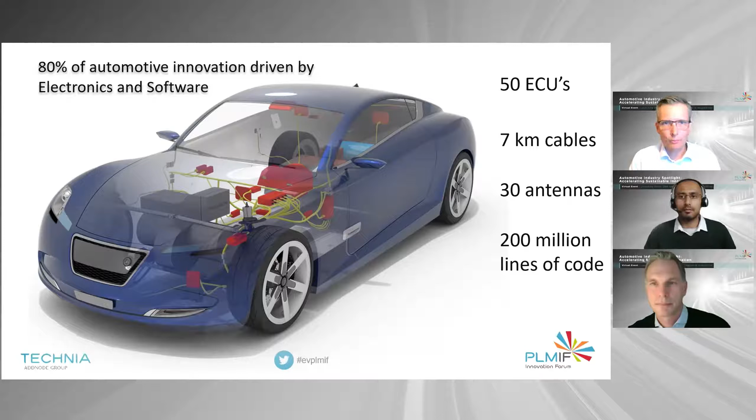Let's leave that as an introduction for the topics we are going to address today. The main topics we want to share with you today: first, I'm going to share some insights into how software can be managed in a PLM and ALM context. Then Thomas, you will tell us a bit about electromagnetic simulation. And Amit is going to walk us through electrical engineering and all these challenges related to harnesses and PCBs and everything related to that. So let's get started.

Let's continue with the first topic, integrated software development. Software is now increasingly becoming a hugely important part of vehicle development. Historically, developing a new car was a lot about managing the mechanical development and all the physical parts that make up a car. That is still relevant, but it's relatively losing importance compared to electronics and software development, as we see an exponential growth in support systems that a modern car has, from entertainment systems to the development towards autonomous drive.

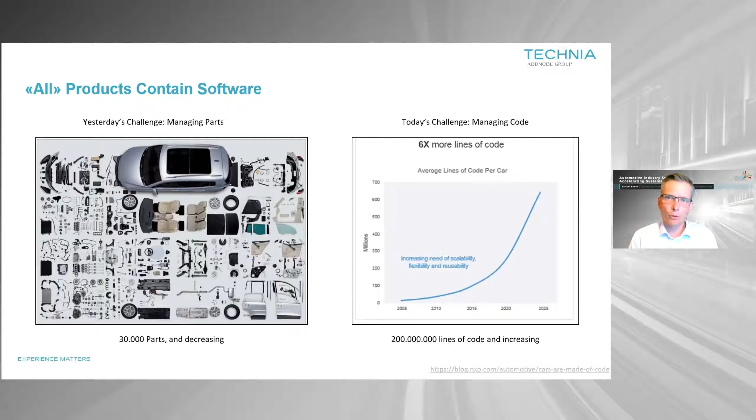Linking that to the topic of the day, product lifecycle management, and how this can be integrated and managed using modern computer systems. The 3DEXPERIENCE platform from Dassault, which we mainly work with to manage the development of cars and other products, is built around a digital definition of the product. To establish that digital product definition, you have to integrate models covering all disciplines. Today we are touching on simulation, electronic design, and software.

All of that information is brought together into what we call a unified product structure that represents the product and carries all information that is needed to design and describe this product to the tiniest level of detail. In this shift from document-based ways of working, we now see a big transition towards more model-based ways of working, which means a PLM system, PLM platform needs to be able to manage models coming from all these different domains.

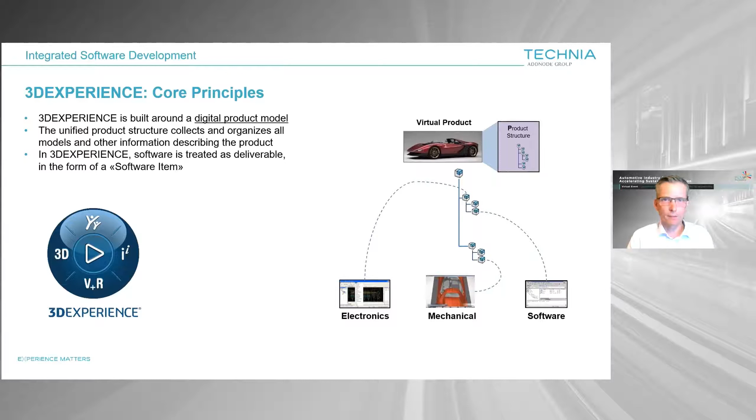So in this first presentation, I'm mainly going to focus on how the software aspect is managed. Software, even if it's not a physical thing, is still part of the definition of the product, which needs to be managed in line with the more traditional geometries and harnesses and everything that makes up the definition of the car.

So from a 3DEXPERIENCE point of view, you always have this product structure that represents the car. In this example, an ECU, and the ECU, of course, contains both mechanical components, electronics, and software that is running on that unit.

So in 3DEXPERIENCE, we have a notion of software items, and with the quite new role and capability called software engineer, you are able to link the actual code and keep track of the version management directly as items in the product structure, meaning that you have the same level of configuration control, version control, and visibility of which version of the software goes with which version of the hardware.

You can even establish and maintain links to external code repositories. So the actual code will normally not be on the 3DEXPERIENCE platform itself, but it will be linked there from external software code management, configuration management systems like Git.

But for full visibility across all disciplines and all members of the engineering teams. When talking about software and software development, we also get into a territory where the actual development processes are a bit different from the traditional mechanical and electronics development.

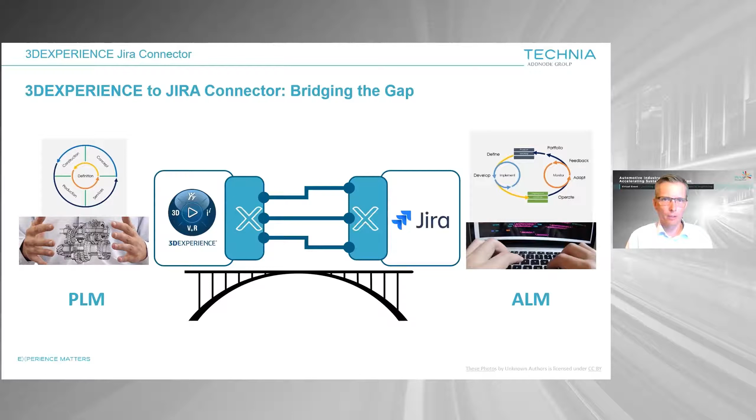So what we have done to mitigate that issue is that we have developed a connector that brings 3DEXPERIENCE close together with Jira, allowing information to flow seamlessly between the two and allowing our customers to use each tool, each platform for the purpose that it's best fitted for.

So to show you or explain some examples of what you can do in 3DEXPERIENCE, like we have already mentioned, you have your engineering items that are organized into product structures.

That is the kind of main carrier of information. Related to that, you have a number of different artifacts and processes that represent different activities that have to take place during development. It could be change management, requirement management, ad hoc or planned task management, and keeping track of issues, as some examples of what you typically would take care of using a PLM platform.

Some of these same needs and concepts also exist in the ALM world, but in that world you usually use different terms. In Jira, for instance, everything is concentrated around different types of issues that you use to organize and plan your work, typically as epics, stories, tasks, and bugs to keep track of anything that needs to be fixed.

Using our 3DEXPERIENCE to Jira connector, you can easily build a mapping between your information models and processes that you work with on either side.

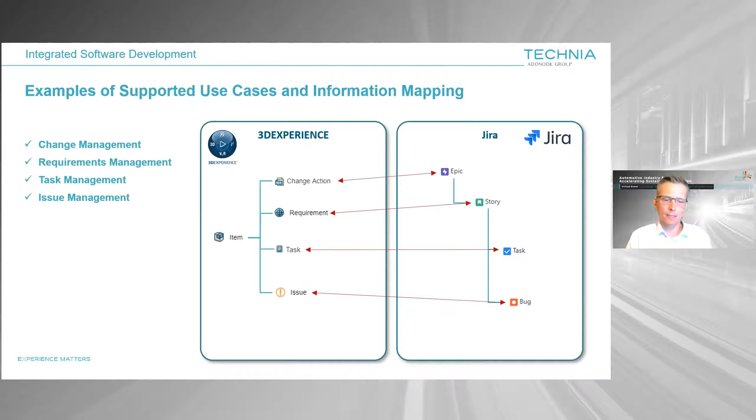So as an example, you might want to map your change actions into epics, your requirements into stories, tasks could be, as in this example, something that exists in both systems, and then an issue identified in 3DEXPERIENCE might become a bug in Jira. But we support full flexibility so that you as a customer can map whatever information item into any information item in the other system.

So to show you an example, starting with issue management: what we see here is that in 3DEXPERIENCE we have the same examples we saw before, the ECU that contains hardware components and also software items. In this case, there is an issue identified.

There's a problem with this unit, and it's not yet clear what is the cause of this issue. So it's raised against the end item, the complete ECU with the full product definition.

After some investigation, it is concluded that this is an issue that has something to do with the software. It's not a hardware issue. So you want it to be resolved by the software engineering team working in Jira.

As soon as the issue is properly described, you will initiate this process, and the issue will then automatically be replicated as a bug into Jira.

On the Jira side, the software team will start investigating and mitigating, fixing this bug and correcting the software code, probably creating subtasks and planning and executing their work as they normally do inside of Jira.

As soon as the job is done, it will be reflected in the workflow in Jira, and a signal will be sent back to 3DEXPERIENCE that now this job is complete, and the issue can be closed.

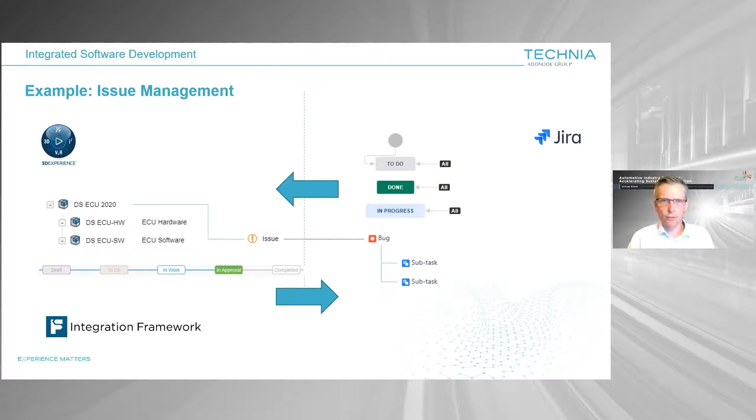And then we'll ensure you that you have closed-loop traceability all the way from issue identified until the problem has been solved and the new version of the code has been integrated into the product.

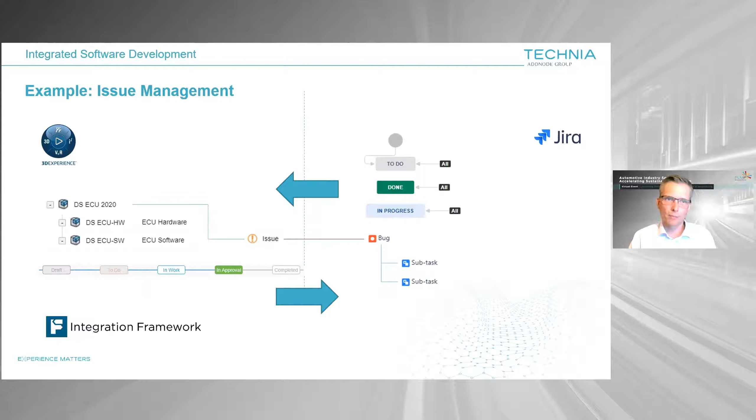So by running through the exact same process again, what you would do from the 3DEXPERIENCE side is start by creating an issue where you would typically describe and categorize the problem. What is the issue? How critical is it? And so on. Capture all the details.

Then you would link it to the product or item where the problem has been identified, and you might want to add some supporting documentation. Could be screenshots, images, any other documentation that explains in more detail what the issue is about.

So what will now happen in the background as soon as you start the workflow is that the issue will, by the connector, be sent to Jira.

In that case, it will quite more or less instantaneously show up in the inbox of the software engineer that is working on that issue.

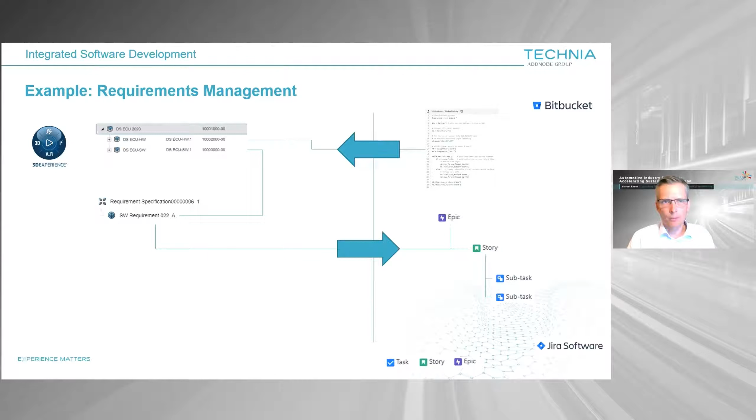So we could consider the requirement specification to be an epic, and then manage each individual requirement as a story that needs to be implemented. On the Jira side, you can then use all the normal functionality to break this further down into individual tasks and activities. And then, of course, the end result of this development would be a piece of code that you would then link back into the product structure as a software item.

This is what it would typically look like. In this case, you have the requirement management module in 3DEXPERIENCE to the left, and you have Jira to the right. As soon as a requirement is ready to be processed, it will be sent from private to in-work, and that will then automatically make it available in Jira. So this is an example of what it would look like.

Like in the issue example, you can see that the detailed properties of the requirement also include, not shown on this picture, any rich text, images, any more detailed description of the requirement. But all the key properties, the life cycle state, is brought across to Jira, so that the software engineers can easily access the information they need to start their work and feedback on the status and progress on implementing and fulfilling this requirement.

And related to that, another area that we support is, of course, also the test management to verify and validate that the software requirement has been properly implemented and that the requirement is met. There are also many other examples, but for this session, we'll stick to these two.

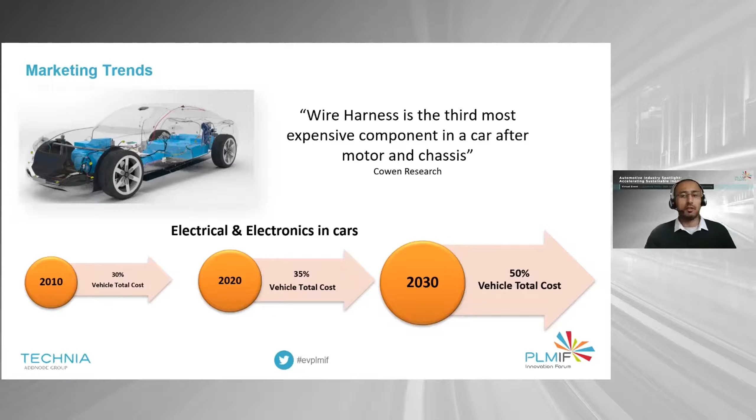So the overall process would be, outside of 3DEXPERIENCE, perhaps you might leverage some parts of the platform to help with preliminary aspects of the electrical vehicle design. That's the specification planning - what is the actual requirement? Perhaps you decide the first requirement is, hey, I want an electric vehicle. How many motors? Does it need to be all-wheel drive, front-wheel drive, rear-wheel drive? How is it going to be controlled? What's the range, etc.? So all of that information, you may use other aspects of the 3DEXPERIENCE platform to capture those requirements.

You then have system architect diagrams and a control architecture diagram, where you determine what components you need and how they would affect one another. Perhaps you may have a radar sensor at the front of a car that needs to communicate with a controller which controls the motor speed. So as it approaches a distance, coming up to a vehicle in front, the radar might tell the vehicle to slow down, reduce power to the motors, etc. So you'd set all that up in your system architecture.

Once you have all that defined, this is where 3DEXPERIENCE comes into itself. You'd go down two routes, and it doesn't matter which, you can bring them together collaboratively. Typically you'd go down the 2D schematic route - creating a schematic of how everything is laid out and how everything will talk to one another. What pin communicates with what pin on a different controller or sensor, how one sensor feeds into another, etc. All of that is drawn out in your 2D schematic.

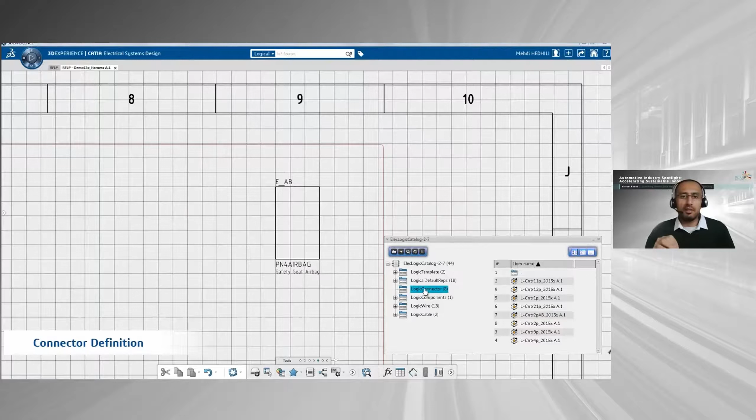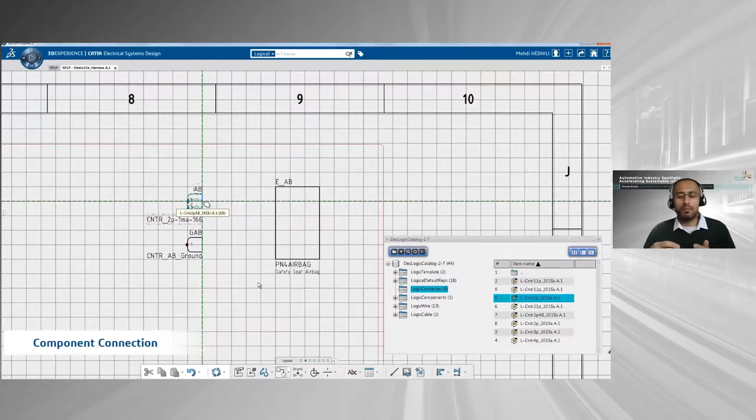What you tend to have is individual components stored in a catalog, so to make everything easy going forward, you'd spend time initially doing the setup. You can see here on the screen, currently we are taking connectors which have been previously defined, stored in a catalog, and reused in the schematic we're looking at now. The reason for that is, generally for electrical design, you're reusing components - you're not generating or creating new components. You'd go to a manufacturer of a component and store that information in your catalog to reuse later.

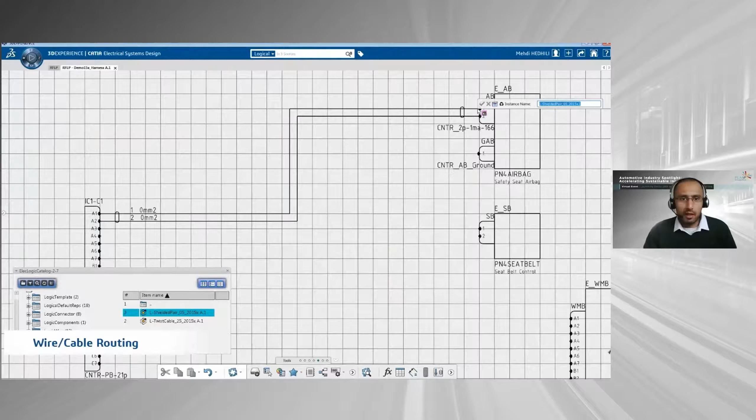What is unique in different electrical infrastructures is the routing and how one component may communicate with another, but the end components are typically reused. So in this case, we have a bunch of connectors and control modules, and what we're doing is basically routing the individual wires from each pin from connectors and telling 3DEXPERIENCE what connects to what - where is A, where is B.

Eventually what we'll have is a full infrastructure diagram. We've told it the size of each wire, and we can give the wires a unique identifier as well, so we know what wire communicates with what, and which pin it goes from one controller to perhaps a sensor.

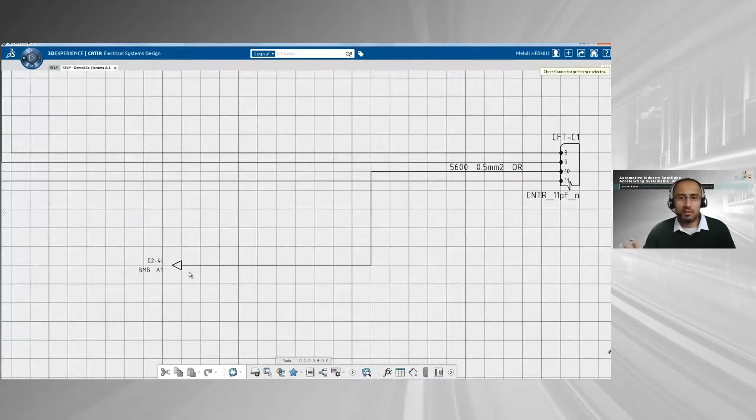You can see from the screen it's literally just drag and drop. You click on one component where it starts, and click on another where it stops. Once we've designed that in the schematic, we can take that and feed it into our 3D.

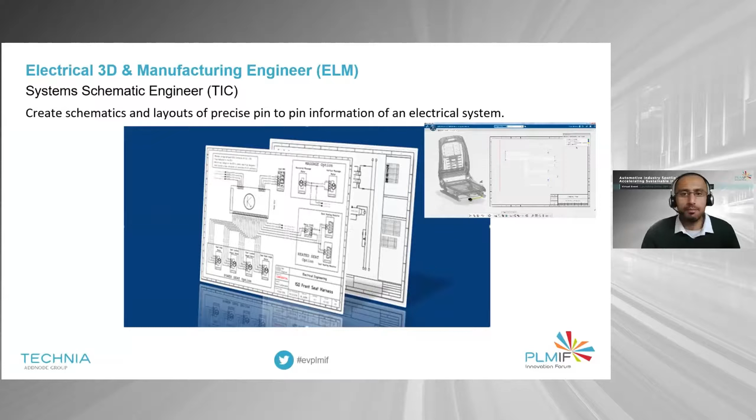What we would have done is taken that information and used it to drive how our 3D wire harnesses are laid in the vehicle itself. If we move on to our next slide, what we would typically do in our 3D now is create our library, similar to how we created a library for our schematic. However, we still need a 3D representation for the CAD.

As I mentioned, all of these components are usually purchased off-the-shelf. There are suppliers you can purchase these from, and you would download these components rather than design them yourself. Unfortunately, currently there are no electrified standard parts. There are electrical standard parts which you can download, but they are just dumb solid models typically. I think the ISO standard step files are looking for a way to unify that, but we're not quite there yet.

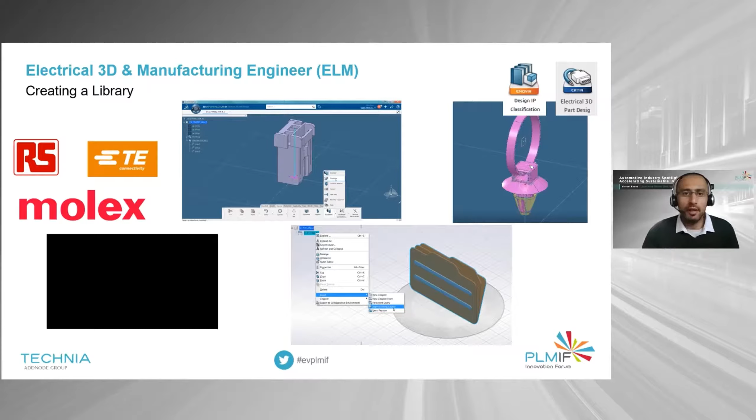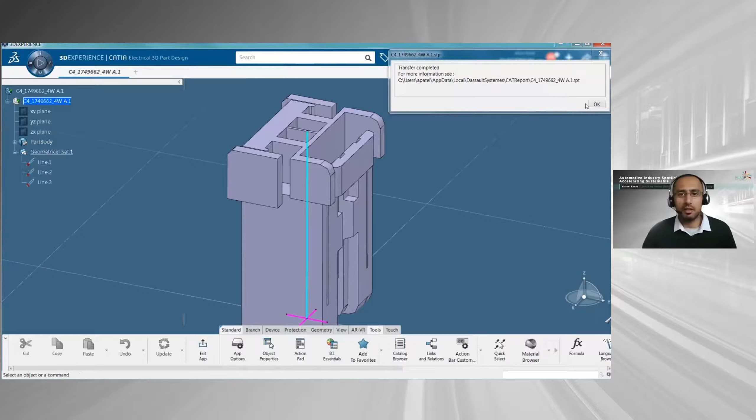So what we will typically do is download these models from a manufacturer and import them into our 3DEXPERIENCE session. There'll be an ISO standard file type, like a step, and we would build our library. We wouldn't do this on a need by need basis, thinking 'in this particular harness I need this connector today.' You would look at your complete arsenal of connectors and think, I use all of these connectors from this manufacturer, these from this other manufacturer, and take the time to build my library inside 3DEXPERIENCE. Now, before we build our library, once we've imported the dumb solid, we have to electrify it.

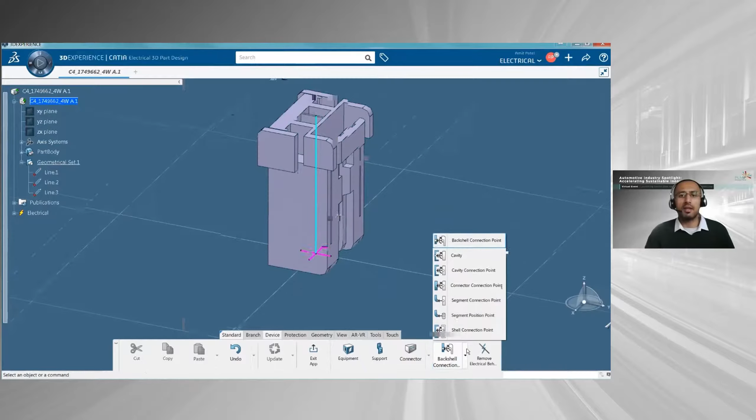So we have to tell 3DEXPERIENCE how it behaves electrically. We'll define how many pins it has, where the bundle connects to the connector on the back, how it may connect to a back shell. So later on, once we have it in a catalog, we would be able to say this back shell needs to connect to this connector, and everything will just connect and align as required. To get the alignment correct, what we do in 3DEXPERIENCE is make use of axis systems. In this particular case, we are using axis systems.

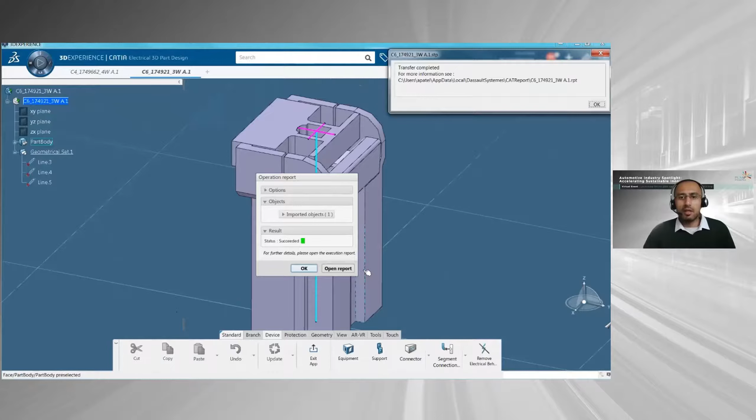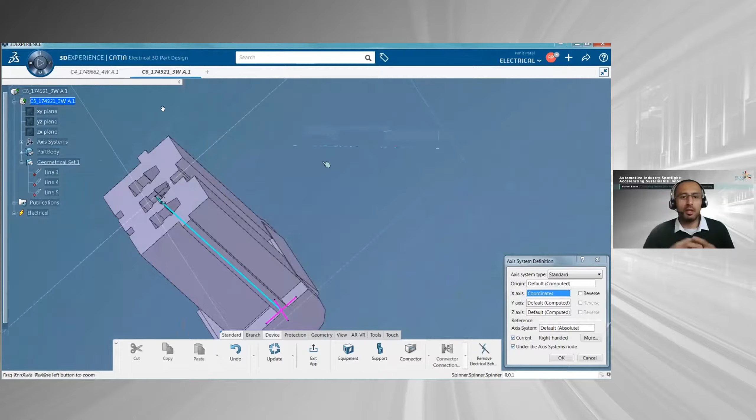Now, I've talked a lot about connectors, but we aren't restricted to just connectors. We can use other electrical components such as supports and retainer clips, etc. If you have a control module that you want to electrify and place connectors inside, we can electrify the control module as well. And the benefit of the 3DEXPERIENCE platform is we can also remove electrical behavior. So if we've accidentally electrified a CAD object that didn't need to be electrified, we can remove that behavior as well.

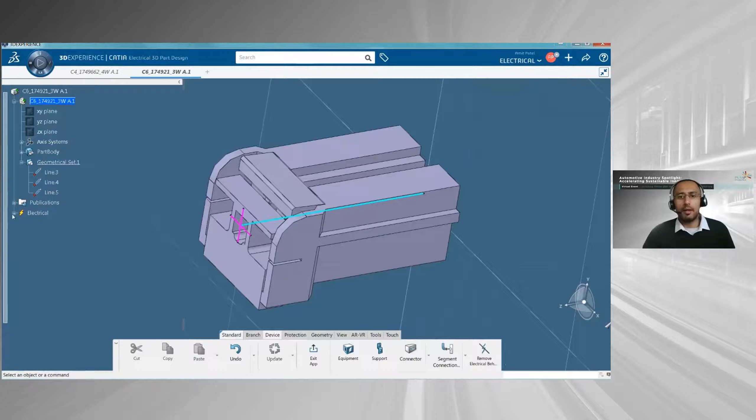From here as well, we can also create protection, so any protective sleeving that you would use to build your harness, or heat shrink, you can define that in here as well. Eventually, with our support, we would take all this information and compile a catalog that we can reuse.

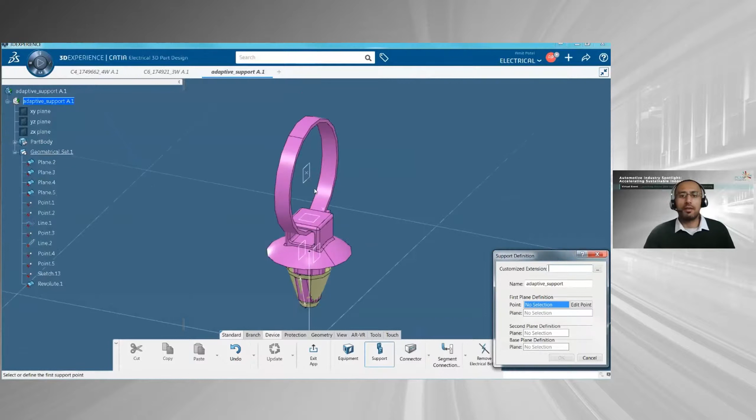So having built our library of electrical standard parts that we'll be using, and given them electrical definition inside 3DEXPERIENCE, the next step is to place the components. So where will they be placed? We would know from the rest of the CAD. Take the example of a car door: you would particularly know where the connectors would be as a rough estimate, place those connectors in those positions, and then create a wire route harness.

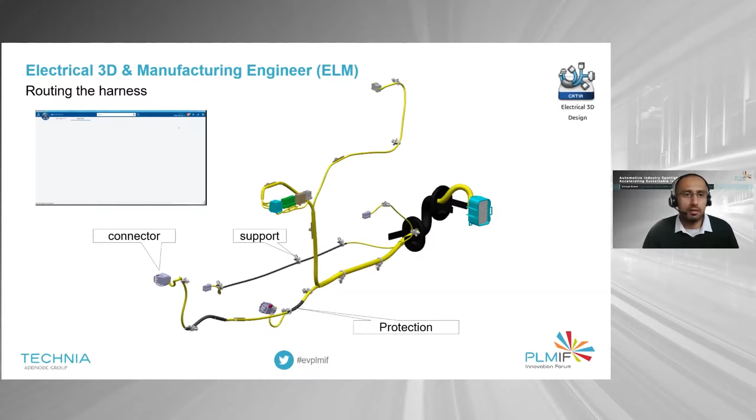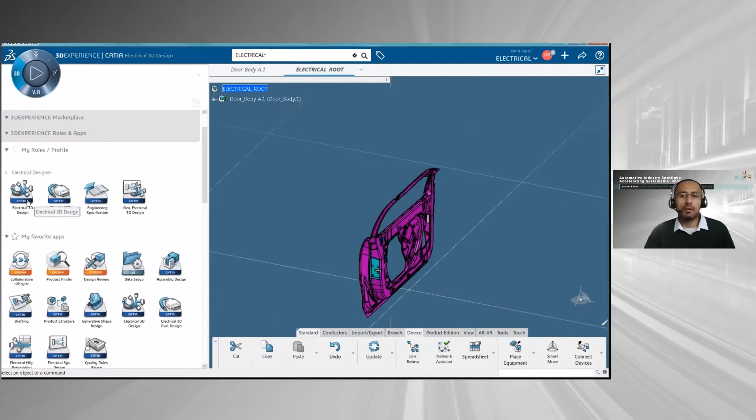So if we have a look at that - the benefit of using 3DEXPERIENCE Electrical is if someone suddenly changes part of a structure and it's now clashing with your connector or your routing, it's very quick and easy to just move a connector or add more control points to reroute your harness around the obstacle. You can also use the obstacle tool in 3DEXPERIENCE, which will allow you to automatically avoid other objects.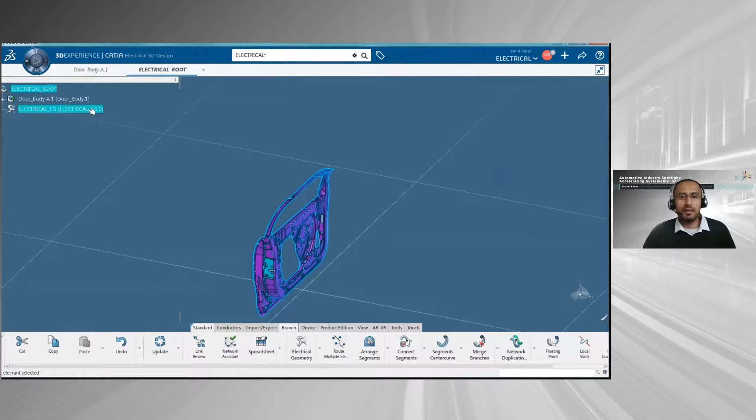So what we're doing here now in 3DEXPERIENCE, we're actually creating an electrical assembly. This is different to a CAD assembly because we're telling 3DEXPERIENCE that it's electrified, and all we're doing is taking connectors from our catalog.

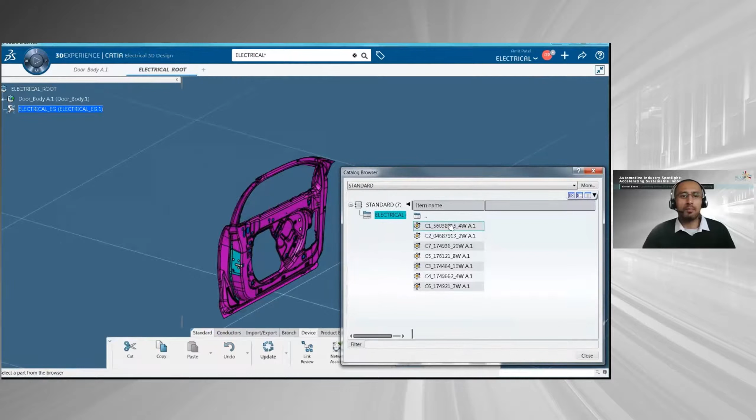So these connectors that we downloaded from our manufacturers and then electrified in 3DEXPERIENCE and stored in a catalog, and then we'll be placing them in this particular car door, wherever we would like them. You can see it's literally just select the connector and click where you would like to place them.

So you can, of course, later orientate it, and it's no different to handling any other type of CAD data in assembly. The only difference is there's electrical definition in the background.

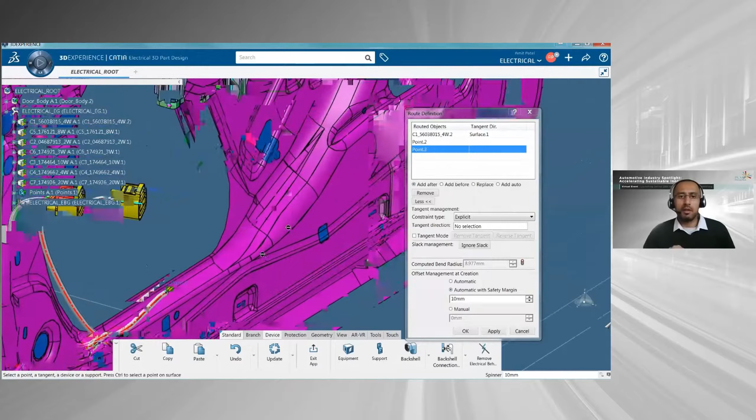So once we've placed all our connectors, what we would then do is essentially route a harness. Don't forget, at the moment this harness is a bundle. So let's say there's 50 wires going from one connector to maybe 10 wires to another connector. We're currently just saying there's a route between connector A to connector B. We're not interested in the pin information at this point.

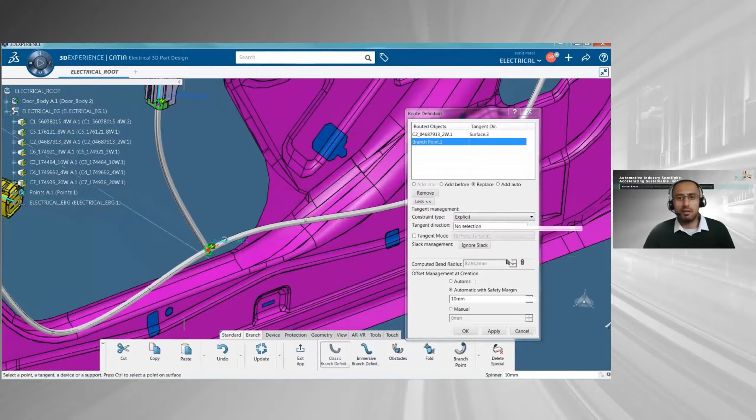So we can see here on the screen that we're creating branches from the main harness to create connections from connectors to connectors. And because we've electrified the component, we don't need to define where we need to create the harness from. We literally just click on the connector and it knows where the bundle needs to terminate.

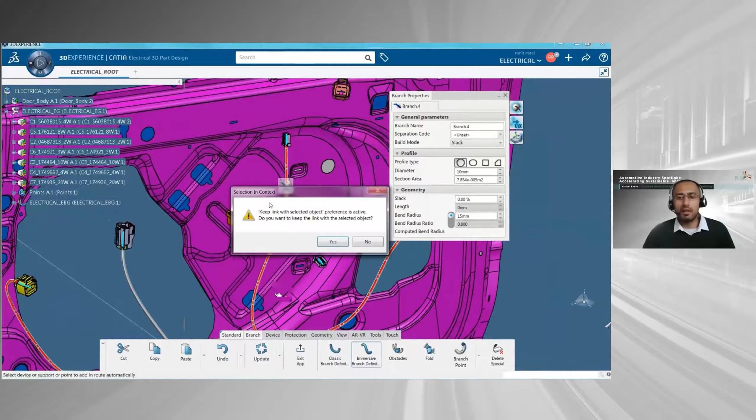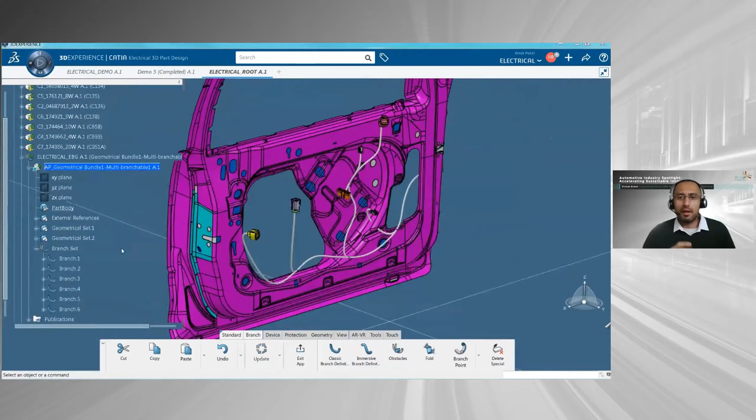And we can, on the fly, create branches off our existing main bundle route. We can define the size of a bundle route, and we can change the section type, so we don't need to be restricted to circular profile types. And we have various different ways that we can handle how that harness goes through from A to B, so we can use what we call the robot in 3DEXPERIENCE to manipulate the position.

Now, once we have that nicely defined, in this particular example we have all the connectors all connected. We may add protective sleeving, and we can use protective sleeving that we've initially defined and stored in our catalog as well.

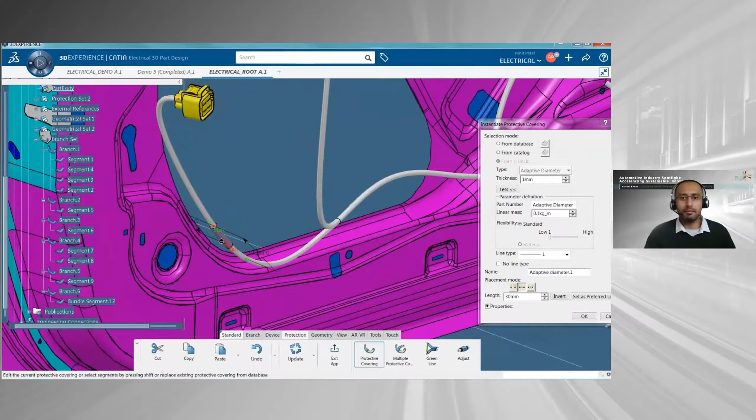So once we have it all nicely laid out how we wanted, we've got around all the obstacles, in this particular case the car door. We would take our pin-to-pin information and our wire information from the schematic. So that would particularly say, let's say we had a 50-pin connector that communicates 10 of those pins go to connector B and the other 40 go to connector C. And then we're able to tell it which route they will take.

Now, if you don't use the likes of 3DEXPERIENCE schematic designer, it still has ECAD integration with the likes of Zuken, especially the E3 series. So you can take the schematic information out of Zuken and use that directly in 3DEXPERIENCE. Now what tends to happen is you would reuse that and take bundle lengths out of 3DEXPERIENCE and back into Zuken as well. It depends where you want to create your manufacturing drawings, but you can now do it all straight from 3DEXPERIENCE.

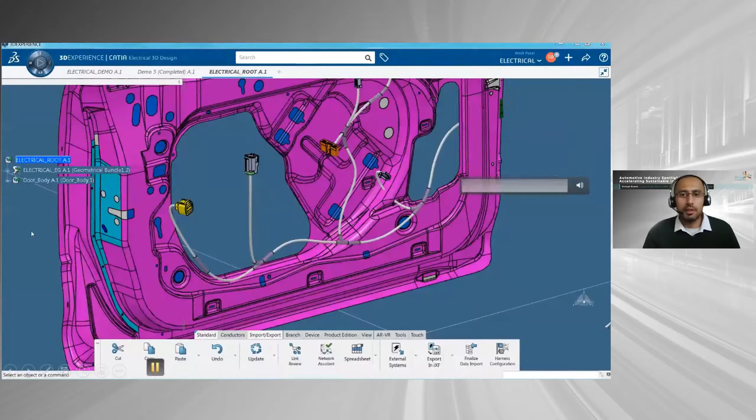So in this particular example, now I've got my harness. What I'll be doing is actually adding an electrical physical system, so actually telling it what pin information, what pin from what connector goes to which pin on another connector via which route.

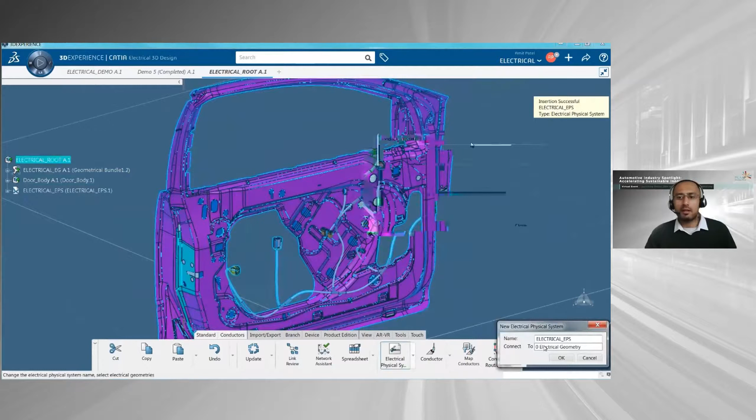So this information is stored in something called an EPS, electrical physical system, and it can be associated to one or more electrical geometries. So electrical geometry would be your individual electrical assembly, but with larger harnesses you may want to break these down into more manageable electrical geometries, so smaller assemblies. But you can link these all together by a single electrical physical system.

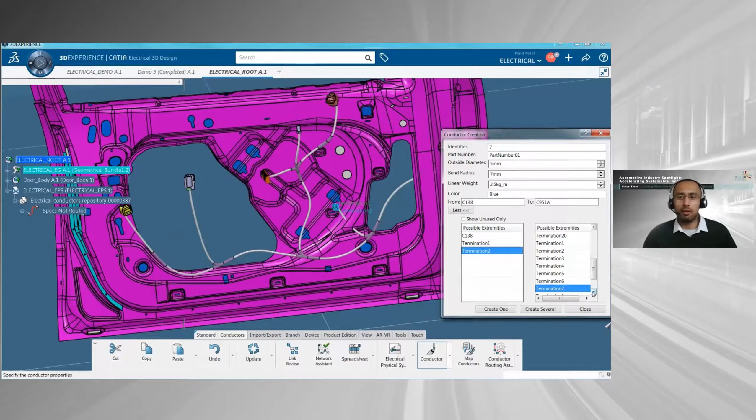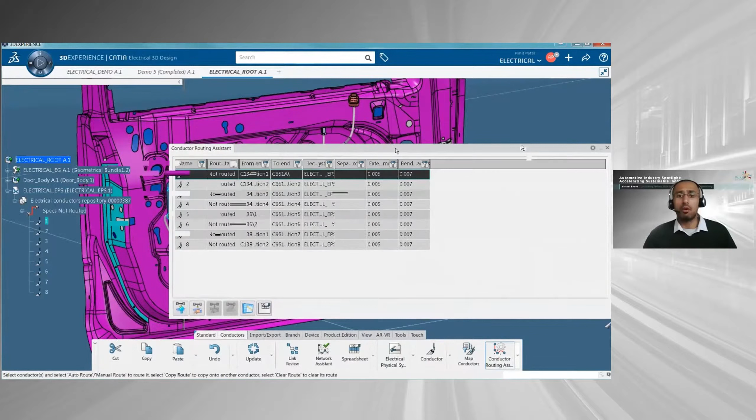Now in 3DEXPERIENCE you can create conductors, as they're called, so individual wires, on the fly. So what we're doing here is we're telling it, we're creating a wire from a termination, so a pin number on connector A to a pin number on connector B. This is the manual approach, and we're not doing this using the schematic output from 3DEXPERIENCE or the output from an ECAD solution. Typically this isn't the most common approach, but it is now possible in 3DEXPERIENCE to create your conductors this way.

The most common approach will be to use the schematic from 3DEXPERIENCE or the ECAD solution. So in this particular case we're using an output from Zuken, and we are basically defining the information. We're basically mapping the information from Zuken onto what we've got in our 3D, from the output of an XML file in IXF format.

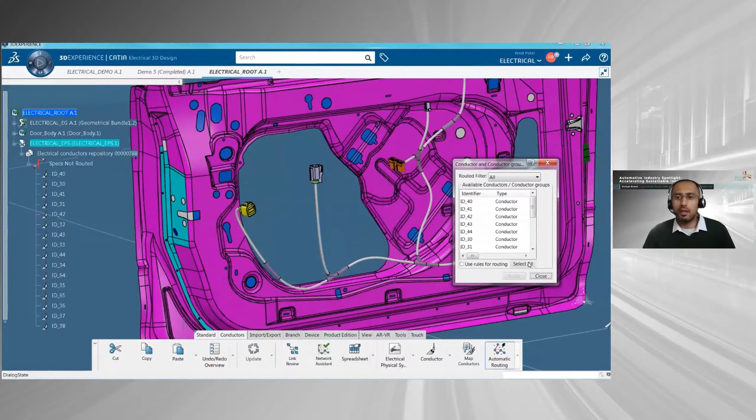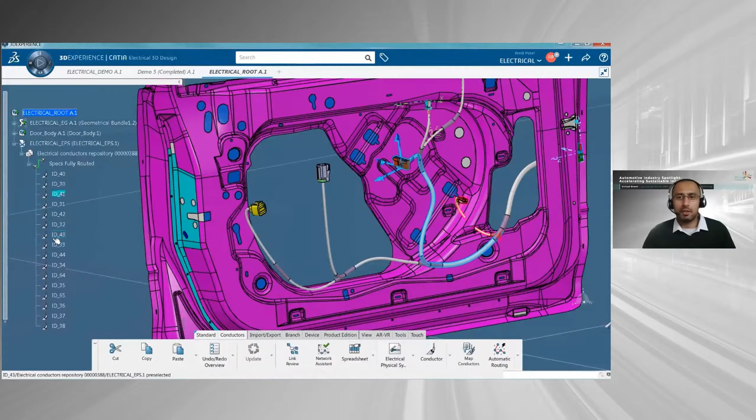Now, what you can see on screen, it knows which wire goes from which connector to which connector, so it's literally in a straight line. But from a click of a button, 3DEXPERIENCE can automatically route those. And depending on the size of the wires, it'll automatically update the size of our harness as well. So it's all automatic. All we're interested in as electrical designers is where things are placed and how the wires are routed between them. We just take the schematic, map all the information to our 3D, press update, and it updates the sizing and the routing.

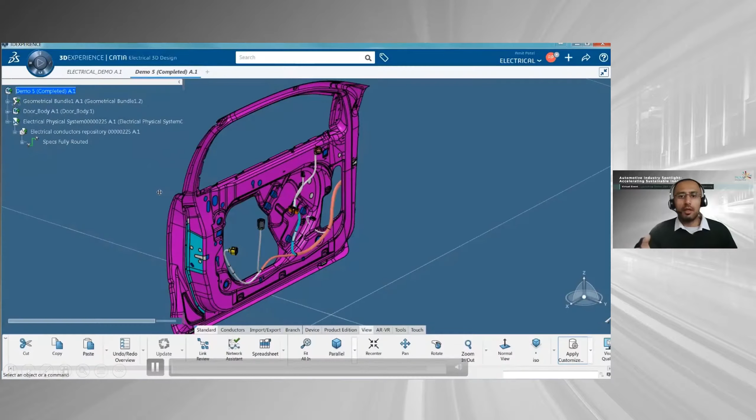Once we have that defined, the next step is to think about how we want to manufacture the harness. What we tend to do is flatten the harness for formboard design or manufacturing drawings. Here's our harness, one we did earlier for our car door. We can see all the thicknesses depend on how many wires are going through the bundle at that point, and as you get to smaller connectors, the bundle size reduces.

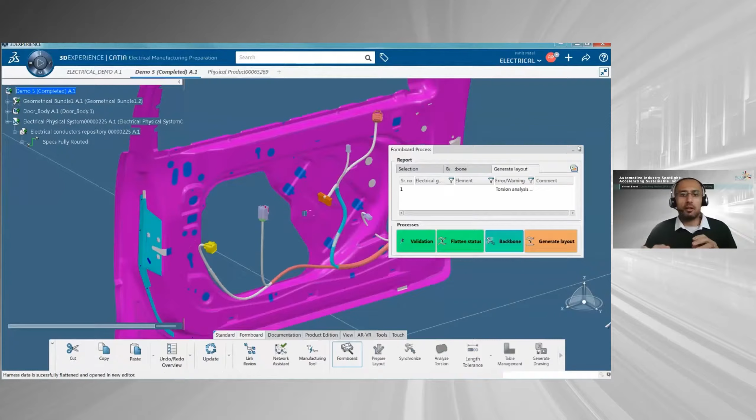We're going to use the Formboard tool to flatten that particular harness. In this case, you have a single backbone, which 3DEXPERIENCE automatically detects by the largest bundle segment size, and it creates branches from there, flattening the whole thing.

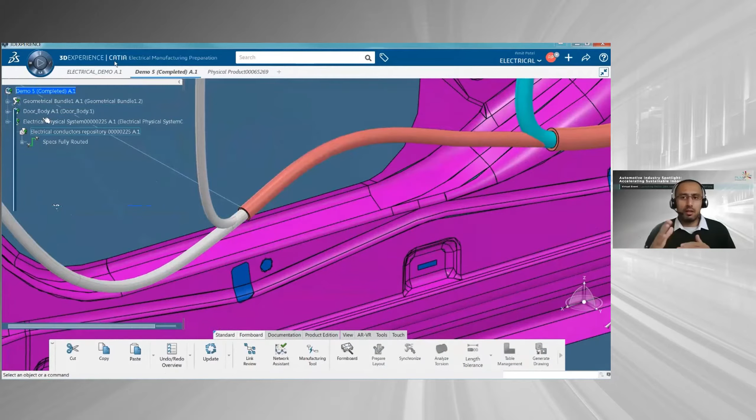What we can then do is manage how it looks flattened. We can control the angle of junctions, change how something is displayed, and for large straight sections that might struggle to fit on a drawing, we can actually reduce the size as well.

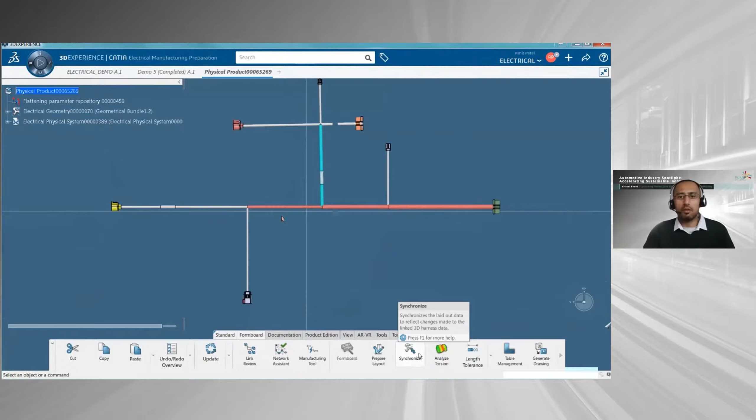This is fully interactive, so once we've created a flattened harness and manipulated the view to how we want it to look, it does automatically synchronize with the 3D. So if you make a change in the 3D later on, it automatically synchronizes to your flattened view, and you don't have to redo your harness flattened view again.

So you can get ahead of yourself and create a flattened view. If you add a connector, it will automatically synchronize. You add components and it'll synchronize too.

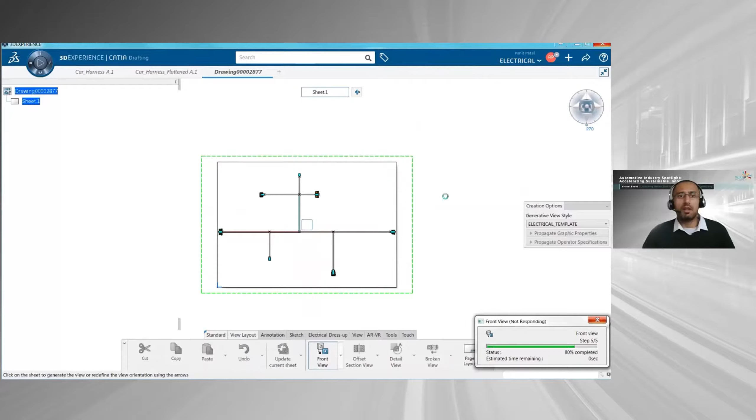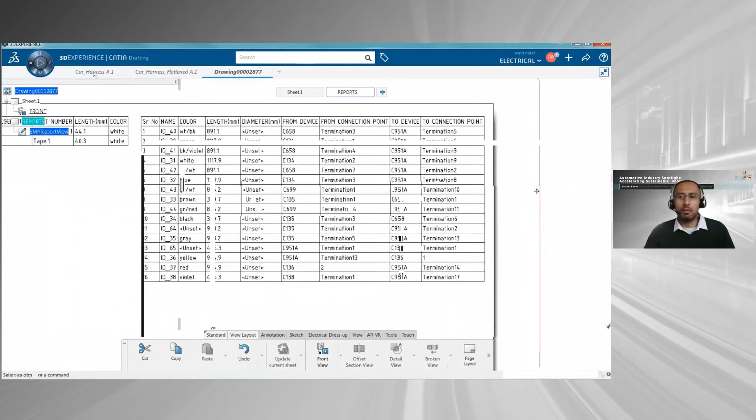One of the advantages of using the 3DEXPERIENCE CATIA drafting app is that you can use something called a generative view style, so you can create a template. We've spent a bit of time configuring our electrical generative view style template, and upon importing a harness view, it automatically annotates our drawing with our table of pin-to-pin information.

We'll have bundle length sizes, connector pin information tables upon each connector, and of course, just like the flattened view, everything is fully synchronized as well.

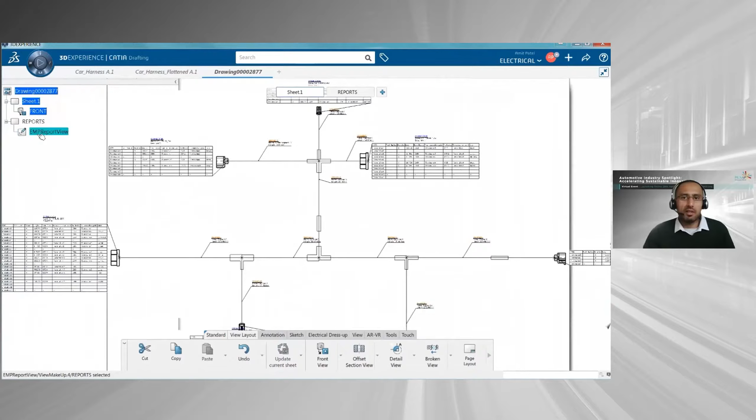So if we go back to the CAD, everything will update - as you make a change, it goes from the 3D to the flattened view to the drawing. From here, we can automatically label any supports, any protective coverings, and you can see we've got all our bundle lengths defined on the sheet. All we need to do is arrange the drawing to how we want it to look best.

That's typically an end-to-end process of how you would use the 3DEXPERIENCE CATIA electrical apps available to you, but there are some more additional capabilities.

You can place all these electrical components on the circuit board itself, and there are bi-directional interfaces with electrical CAD systems, based on industry standard interfaces of the IDF format and IDX formats. The synchronization to other ECAD solutions is bi-directional as well.

The advantage of bringing your circuit board design into 3DEXPERIENCE is that you maximize the capability of the platform and have all the information in one place, so you can all work collaboratively.

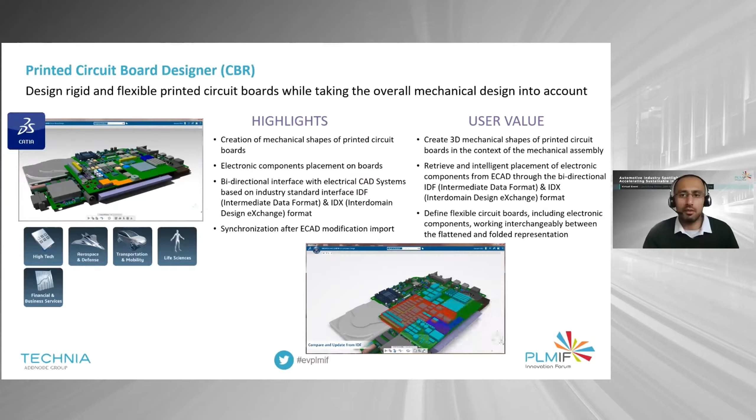It does also have other integrations with other circuit board design packages such as Altium Designer and Cadence Allegro.

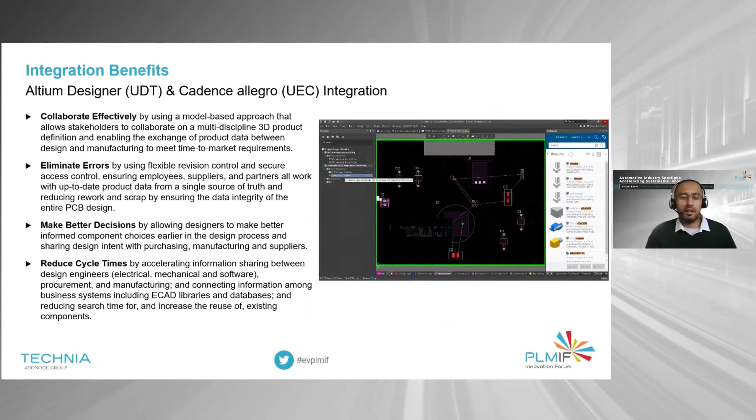The sort of benefits of having the ability to integrate Altium Designer with 3DEXPERIENCE or Cadence Allegro with 3DEXPERIENCE is that the integration allows you to store components directly in the 3DEXPERIENCE platform. So if you're still more comfortable working with these other packages, you can work natively in these other solutions, but still leverage the capability of the 3DEXPERIENCE platform by having the ability to store components in it and leverage other parts of that platform.

So you can work collaboratively with other electrical designers, systems designers, or structure designers - anyone using the platform. It helps eliminate errors, because everything's within the 3DEXPERIENCE platform, a single source of truth, there's a reduction of errors.

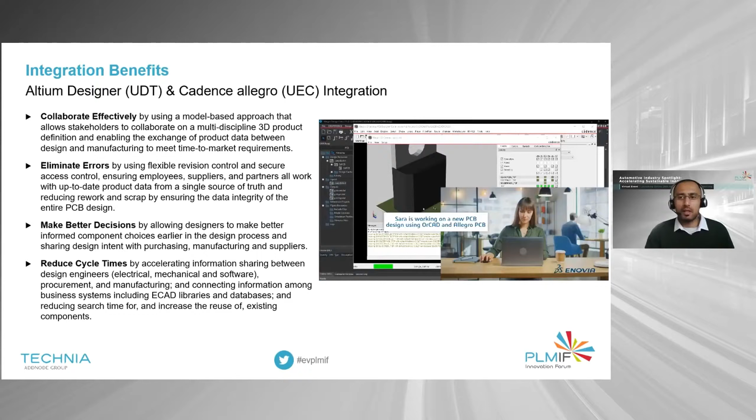And you can make better decisions, because everyone's come into one place to find the information, it allows designers to make better informed choices. So let's say a designer takes information from Altium Designer and uses it in their 3DEXPERIENCE, they can see the changes without having to have Altium as well.

And the main benefit is it reduces cycle time. So the aim of the game is we want to reduce the time it takes us from our preliminary conceptual design stage to the end product and manufacturing.

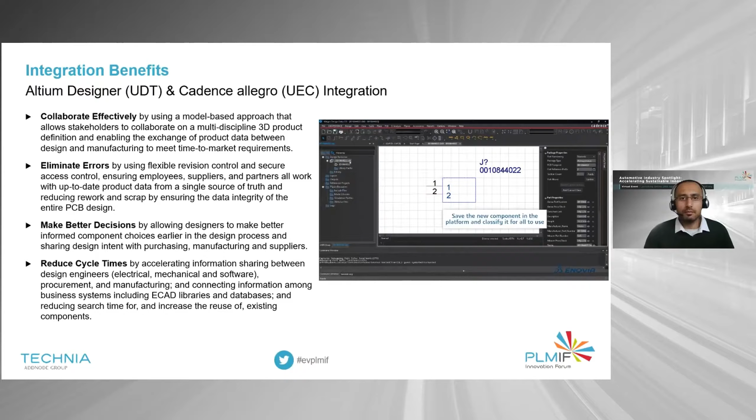So that's me done. My name is Thomas Kislén. I'll talk about some electromagnetic simulation with CST Studio Suite, and also connect to some of the parts that Amit talked about earlier on the wire harness, and so on.

So what about EM simulation? What is that actually? For me, it's really about understanding things, that you can visualize all kinds of electromagnetic phenomena. When you start to see and understand what's happening, then it's a way to do something about the problems that you get, and you can do that even before you have the prototypes or the real parts.

So the hot EM topics in the automotive industry today, where our customers use CST for development and optimization, are really within a lot of areas like antennas and antenna placement, the sensors - all the sensors that you have can be simulated, and also understanding how to improve them. Of course, the electric drive, the powertrain and the battery is a huge part of development today. Control modules, entertainment system, cable harness, and many more.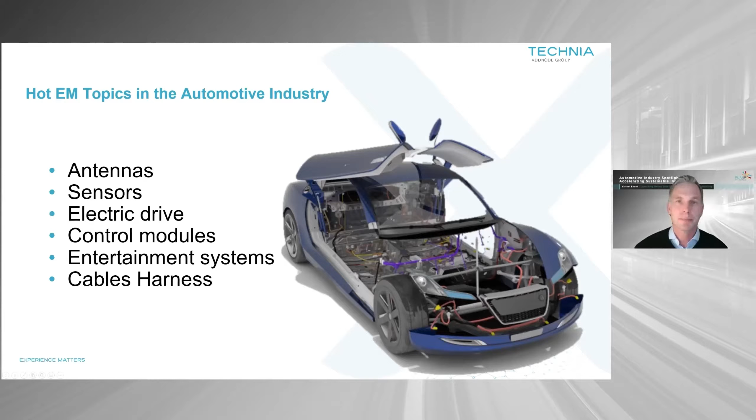So these applications span a large area regarding frequency and size itself, or in other words, electrical size and bandwidth. Let's say many sensors act at or close to the DC point, whereas radar systems you have to use up to the gigahertz range. Typical structures on the PCB are just some millimeters long, and the dimensions of the vehicle itself are meters. And you also see that the cable harness is kilometers.

So it really spans a wide range, and you would need a powerful simulation to cover all that with different solver technologies and meshing abilities. And CST provides easy, efficient, comprehensive development for those products.

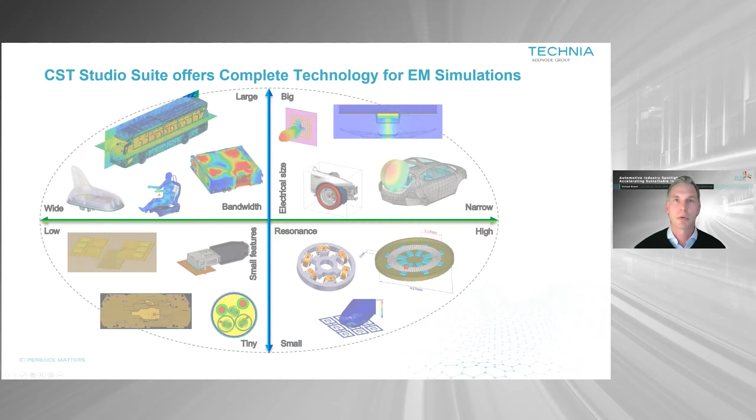New generation of vehicles includes electronics in all areas - for instance, the ventilation system, electric motors, chassis electronics. And the biggest interest is probably concerned with the power of the electric motors, and high efficiency from the power electronics. So you have to also look at the thermal effects and the electrical noise from those motors.

And of course the size, weight, position, and efficiency of the battery systems are also important. There's a lot of changes going on at the moment, and simulation is key to doing the optimization.

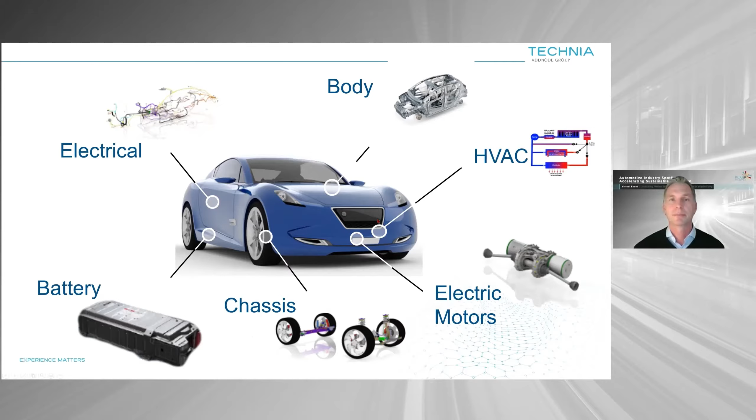So CST as a simulation tool provides all possibilities to get answers to important questions early in the design phase. That could be in connected vehicles or ADAS, AV sensors, electric drive, signal integrity or power integrity performance, wire harness, electrical engineering, and EMC and EMI performance.

So let's take some specific examples. For sure, you've already seen the so-called shark fin antenna for phone and GPS navigation. If you're developing those kinds of things, questions you need to answer are: how should it look? What size should it be? How will the performance be with different sizes? And also, of course, the performance - where should I put it? Where does it work best?

Simulations can give you those answers already at the concept phase. If I choose an antenna and place it on the rooftop, yeah, it works here, but how about if I change to a different car model? Will it still work in that position? It's easy to just change the position and see the installed performance.

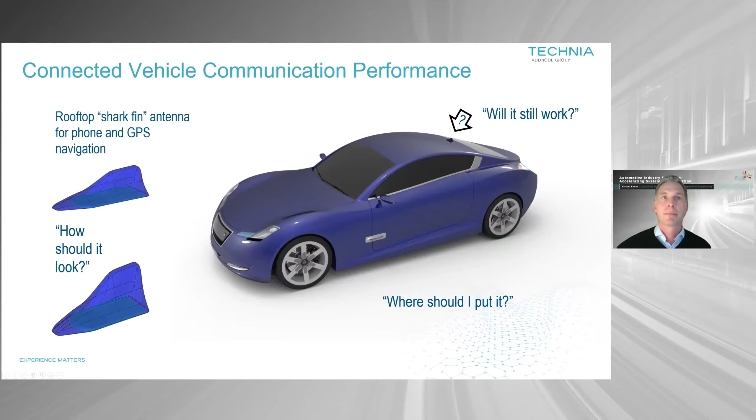And on ADAS, AV sensor performance - those advanced driver assistance systems are developed to enhance safety and better driving, designed to avoid collisions and accidents. Obviously it's really important that in those advanced driver assistance systems and autonomous vehicles, it requires that you know the dynamic changes in the surroundings all the time. So you need to have good connections, and you need to collect all the information to the vehicle to make the right decisions. Simulations can help with that.

And if we take radar as an example, you would need to know about the radar sensor - is it performing? Does it still work if you have ice or snow in front of it, or dirt?

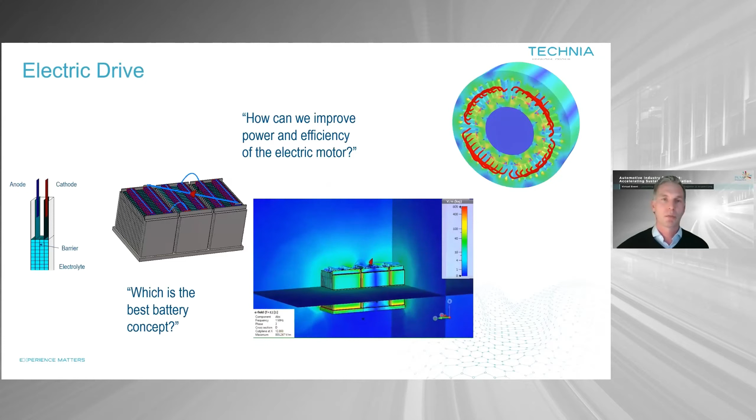Typically, the following questions come up with electric drive: which is the best battery concept, and how much space is required for the battery. Could also be, how can we improve the power and efficiency of the electric motors? And the important thing is to have this combined in one complete tool, where you can cover the wide range of things that comes up.

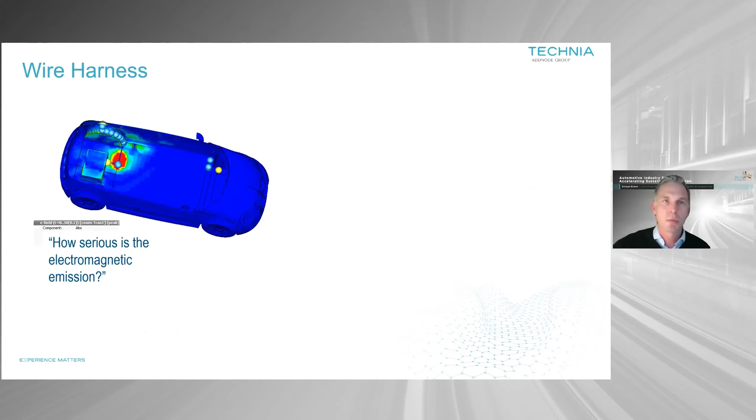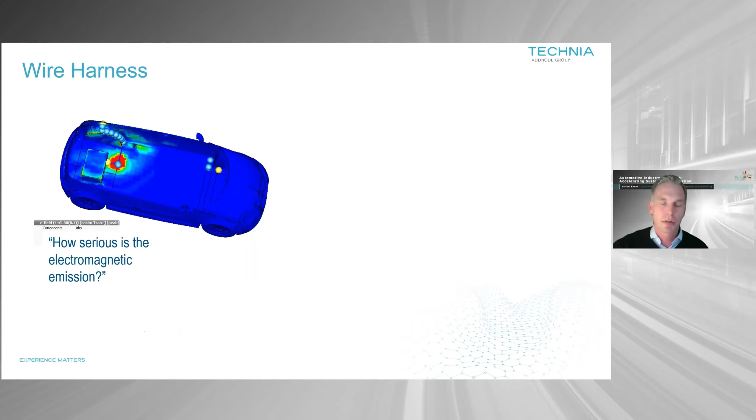Amit showed us earlier about the wire harness and how we can design that, but what happens really when you use it? How does it look like? About this charging situation, the cable wiring, if you place it in one place, will it work, or will it affect other parts or humans, for instance? Those things we need to look at with electromagnetic simulations.

And also shield cables, do we need it or not? It's really expensive, so you would make sure that you only use the shielding if it's necessary. And of course, if it is necessary, how to design that as well.

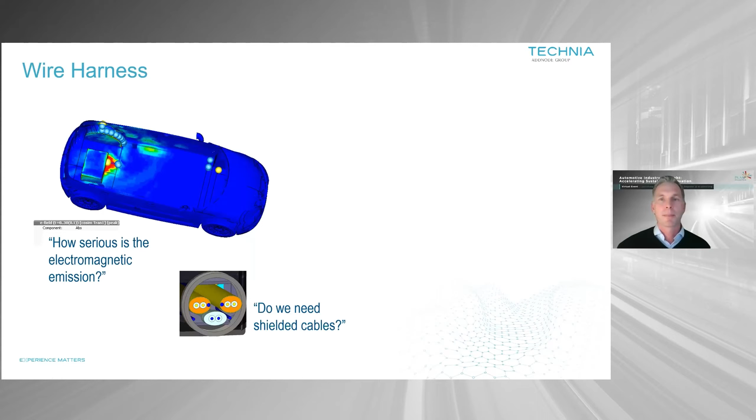Maybe the most important ones, how can we reduce the vehicle weight and the cost for labor to do it? In this case, with simulations, we can simulate the wire harness to look at hot spots where not to place cables, because the cables themselves will act like antennas, even if you don't want them to. So you would like to simulate to make sure that it doesn't affect other systems.

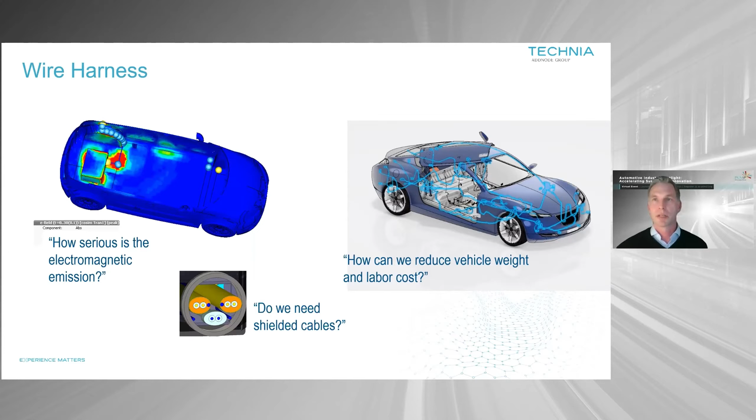All electronic devices have to comply with legal regulations, and therefore you have to make sure that the EMC and the EMI, the electromagnetic compatibility and the interference, you need to check that, always in a verification test in the end.

But when you come to the test, when you have prototypes, you're very late in the design phase and you're ready to go to the market. And if you fail there, of course, that will imply a huge cost.

Normally many components come together in a complete system like a car, and the components themselves have been EMC tested, but when they come together in a complete system, will it work in that case as well? You have to check that, and for sure to do that in an early phase.

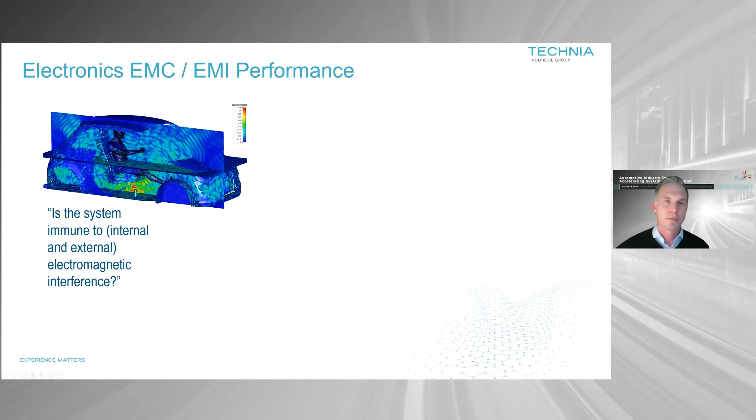There could be questions like how powerful is the wireless charging? Will that affect the car itself or the other electronic components, or will it be harmful for human exposure? Those kind of questions you need to check as well. And it's impossible to test it on humans, so you need simulations to know the rates that you comply with the regulations.

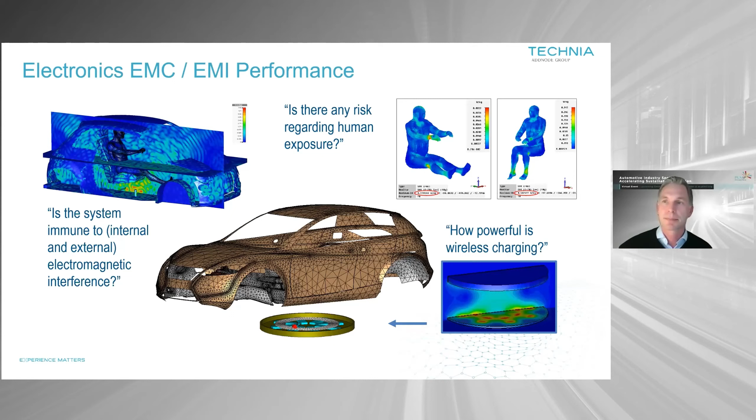So getting the design right the first time is crucial for product development, and virtual prototyping electromagnetic simulations can help you reduce the design iteration cycles.

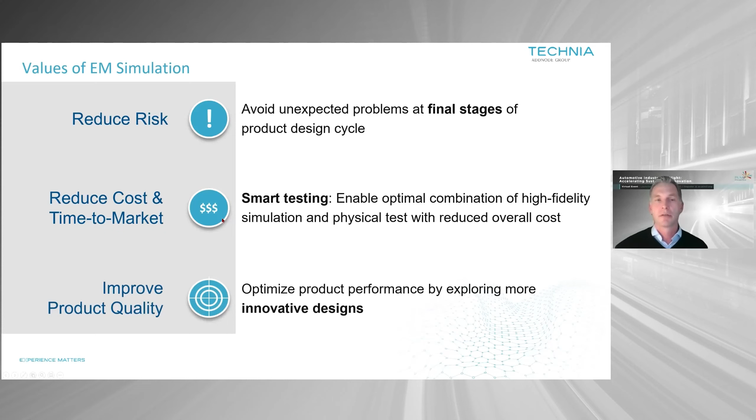Also related to this, smart testing enables optimal combination of simulation and physical test that reduces the overall cost for your development. And finally, you can improve the quality. You can optimize and look at even more variants and do more innovative designs if you have the possibility to understand and see how it looks like in the beginning, to run the complete development.

So some key takeaways from this. Electronics is transforming the automotive industry today, and due to high complexity and the sheer number of electronic parts in the system, EM simulation is key to the entire development process, to know if it works before you have produced it. CST provides the complete technology for all kinds of EM applications that you will face.

And to end with, the main drivers of innovation are electric, connected, and autonomous.